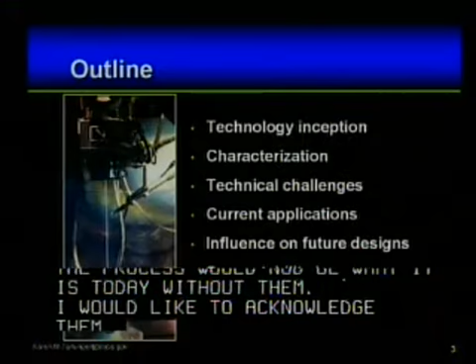Next slide, please. This is an outline for my talk today. I'll start off with the inception of the technology, and then talk a bit about characterization of the materials that are produced using the EBF3 process. I'll then proceed on to some of the technical challenges that we've come across with the process.

Specifically looking at what needs to be solved in order to reach full commercialization. And then I'll switch gears a little bit and talk about applications, both current applications and some potential future applications that we're working on, both for aeronautics and for space vehicles. And then I'll end up with a little bit of the possibilities that this technology may offer for in-space support.

Next slide, please. So starting off with the motivation, a little bit of the process description of the EBF3 process, and then the benefits to talk about the technology inception.

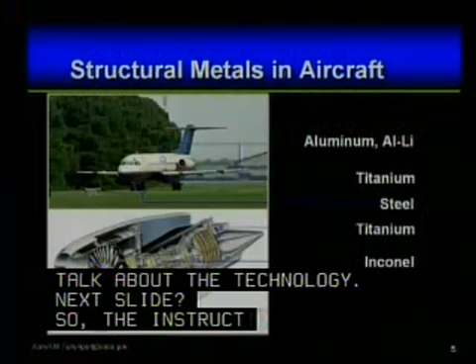Okay, so in structural metals used in aircraft today, typically you see aluminum or aluminum lithium used in fuselage and in wing panels. The highly loaded areas of the aircraft, like wing tips or wing roots, and some of the hot structures in the engine use titanium alloys. High-strength steels are used for landing gear, and Inconel can be used in the hottest sections of the engine. So there's a large amount of metals that go into today's aircraft.

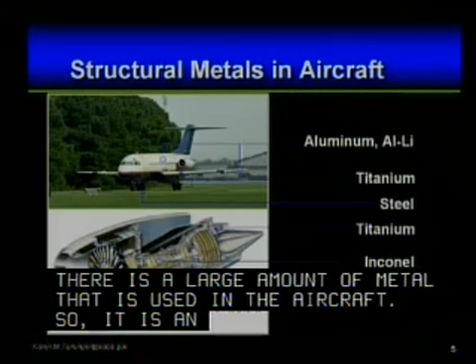And even with future aircraft moving towards composite structures, there's still a significant metallic component in aircraft structures. And so it's an area that we wanted to look very closely at to see what is new on the horizon. We've been building airplanes out of metals for a long time. What's new on the horizon?

Next slide, please. So our motivation, we were challenged back around 2001 to come up with what is new in metals. And specifically looking at efficient lightweight structures, it has to be a cost-effective process, and potential for enabling new alloys that are beyond the current conventional suite of materials that we use were three of the areas that we wanted to look at.

And what we ended up with, we didn't set out to develop a disruptive technology, but we ended up with a disruptive technology. And by disruptive, I mean that this is a technology that has the possibility of replacing a segment of the manufacturing market as it currently exists today.

Next slide. So back in 2001, when we first started looking at what's new in metals processing, layer-additive or deposition processes had been around for several years, but they were primarily using lasers, either a CO2 or a neodymium YAG laser. And the problem with lasers trying to do metals fabrication is that lasers are reflected off of shiny surfaces, and metals are inherently shiny.

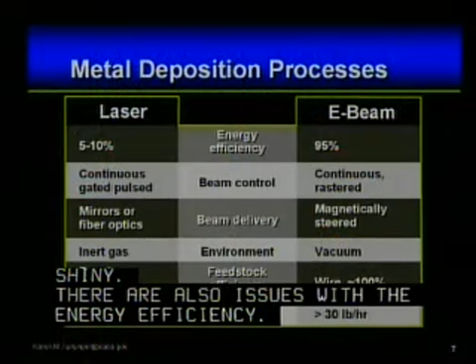In addition to the coupling efficiency between the laser and the metal to be able to melt, there are also issues with the energy efficiency. Only 5 to 10% of the energy, and this has improved over time, but in 2001, only 5 to 10% of the energy that was actually pulled from the wall ended up being used to create the beam. The rest was all waste heat.

So looking at the energy efficiency, the other issue was the feedstock efficiency. A lot of the laser technologies use powder feedstock, and depending on the size of the molten pool they were working with, you could either get 5 to 85% of the powder captured in the molten pool. The rest ended up just being waste powder.

And what really prevented laser deposition technologies from taking off in the commercialized world is the fact that they were limited in the deposition rates. They could only get up to, at the most, 9 pounds per hour, but most of them were down in the half a pound per hour. It's just not an economically feasible or viable technology.

So when we were looking at metal deposition, we said, deposition, to be able to put the metal where you need it and only where you need it, is a good concept. Let's look at what other things could we use. And so we chose to work with the electron beam.

Electron beams have very, very good coupling efficiency with all electrically conductive materials, such as metals. They've got very high energy efficiency. Working in a vacuum gives you a nice clean process environment. And we work with a wire feed because of the vacuum. We're working with a solid feedstock in the form of wire, but 100% of that wire is captured into the part that you're building. And we've demonstrated deposition rates on the order of 30 pounds per hour.

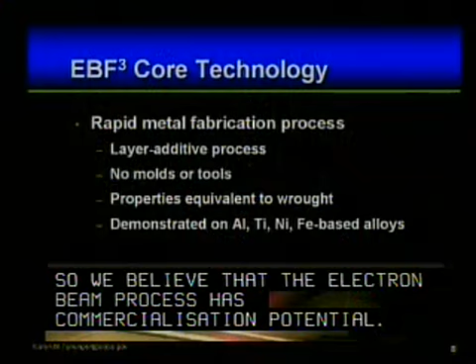Next slide, please. So the core technology for EBF3 is that it's a rapid metal fabrication process. It's layer additive. It does not require molds or tooling, and so a large expense that's used for building tooling for forgings does not have to be absorbed when you're using an EBF3 process.

The properties that we've observed are equivalent to wrought properties, and I've got some charts later on to show you about that. And we've so far demonstrated this on aluminum, titanium, nickel, and iron-based alloys, which are all of the alloys of interest that I showed on the earlier slide for aircraft structures.

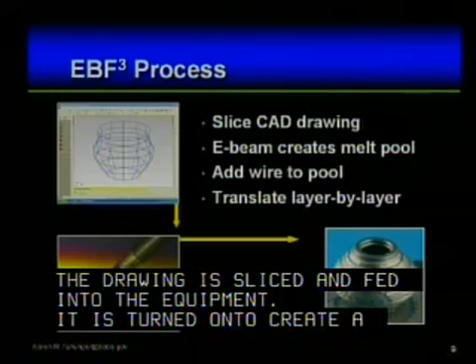Next slide, please. So the EBF3 process, we start with a CAD drawing for the part that you want to build. That part is sliced, the CAD drawing is sliced and fed into the EBF3 equipment. The E-beam is then turned on to create a molten pool, and wire is fed into the molten pool, and then the part is translated in a layer-by-layer basis to build the parts up. We've been teased about building a replicator in the vernacular of Star Trek. Next slide, please.

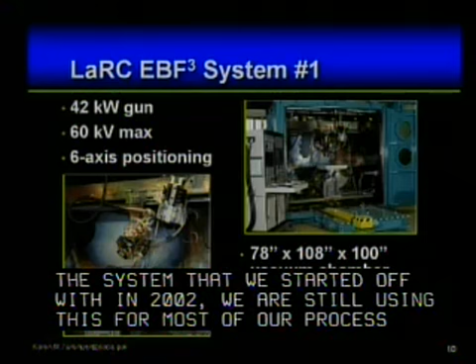The system that we started off with in 2002, we're still using this for most of our process development for our large fabrication experiments. This system is an electron beam welder that we purchased, and we had it modified, adding a double wire feed so that we could build the layers up. It's got a high power electron beam gun. We're only using about a third of the power that is available to us, but because it was a commercial off-the-shelf system, we bought something that could suit what we needed. The vacuum chamber is a 7 by 9 by 9 foot steel chamber, and the build envelope is on the order of 2 by 4 by 5 feet inside of that vacuum chamber.

Next slide, please. Several years after that, we started looking at trying to build a smaller system. The process is exactly the same, so the physics of the process is still using the electron beam to build up a part.

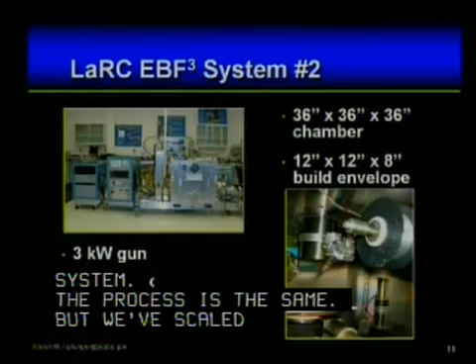But we've scaled everything back so that we could do some demonstrations for 0G. So we built a 3-foot cube chamber with a build envelope about the size of a shoebox. And we've got a 3 kilowatt gun for safety on the aircraft and just to scale everything back. It's enough power for what we need to do.

Next slide, please. So let me set this up for you, next I'm going to have a video. This is a picture looking in the chamber of our large electron beam freeform fabrication system back at Langley.

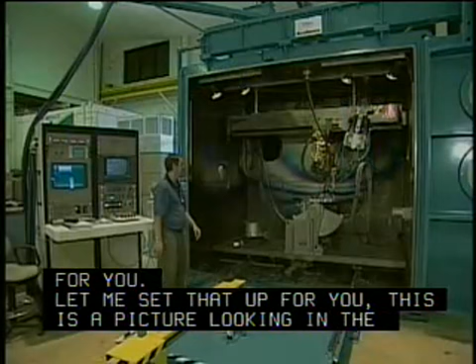If you roll the video, please. This is looking through the door, just showing some of the motions capable in the system itself. Here we're closing the door, and then we would evacuate the chamber down to about 10 to the minus 5 torr. Now our first layer is beam only, so the beam is coming down from the top center of the screen. And the first layer is just to clean off the oxides on the surface and to give us a nice warm surface to be able to adhere the deposit to.

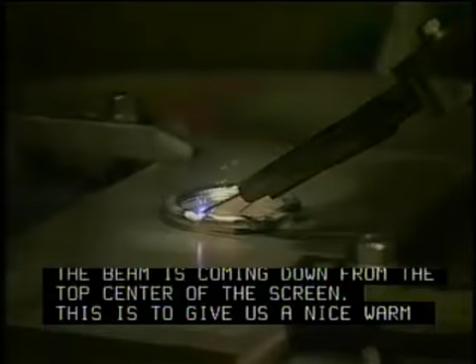Now we're showing the subsequent layers being added on. This is all 2219 aluminum, and this is real time. We can build faster than this, but we're using 0.063-inch diameter wire, and the only part of this that is molten is the shiny part of the molten pool in the image there. So the process solidifies rapidly.

So some of the reasons, I've already talked a little bit about the EBF³ process, but the main idea is that we can build near-net shaped parts, so you can minimize scrap, reduce the part count. It also offers efficiency in design, lighter weight designs, and enhanced performance. The unitized components, unitized meaning being able to build things in a single piece. So instead of building an assembly that needs to be riveted or bolted together, you can build components of some complexity into a single part.

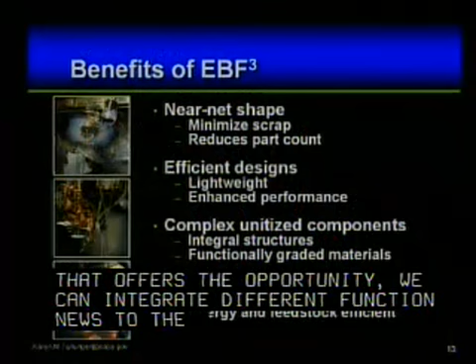And that offers the opportunity, because this is a layer-additive process, to integrate different functions into that structure, or we can change the material on the fly so that you've got different alloys at different points. If you have reason to need different alloys with different properties, we can tailor the properties locally. And finally, it's got some green manufacturing ramifications. This was something that we hadn't set out to do, but it ends up being a nice benefit in that we're minimizing the waste products, and it's energy and feedstock efficient. Next slide, please.

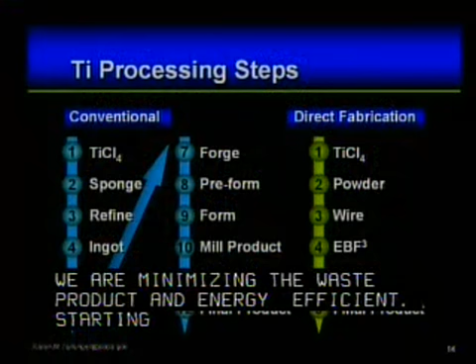To give you an idea as to what I mean by energy efficiency: starting from titanium ore, these are all of the process steps that would be required to go from titanium ore to a final product. On the left, in blue, is the conventional processing that we would use today. So you start with the titanium ore and go through about 12 different steps before you get to the final part. There are losses in energy and in titanium itself along each one of these steps in the process, because you have to forge a billet and then skim cut it, press it down, skim cut it, roll it, skim cut it again. So you've got a lot of losses in the process of just going from titanium ore to a billet and then machining it out to a final product.

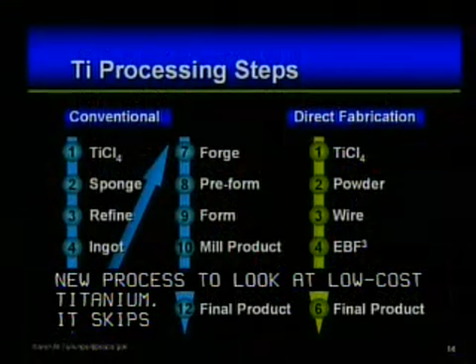DARPA has been working on a new process and has funded several organizations to look at low-cost titanium. The low-cost titanium process basically skips steps 1 through 9 to go directly to a powder form. So you've dropped out a lot of the work that goes into building the preform. And then what we're doing is, we can take that powder, go directly into a wire form, and then that wire becomes the feedstock for E-beam freeform fabrication. So in using this future set of processing steps, you can eliminate about half of the steps and a lot of the losses in both energy and in titanium.

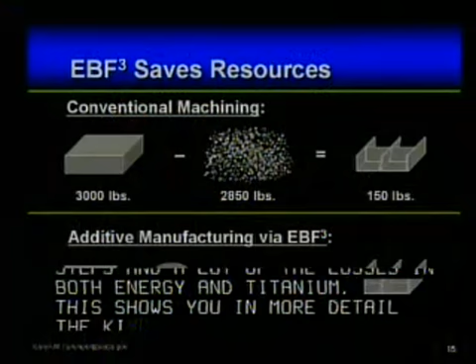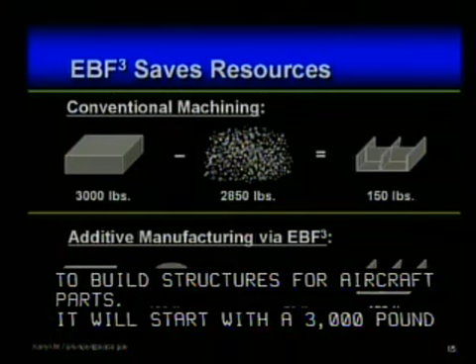Next slide, please. This shows you in a little bit more detail the kinds of savings that we're talking about, and this is the reason that industry is so excited and is really investing heavily now in trying to get this technology commercialized. Along the top line is the conventional machining, and these are real numbers. This is really the way it is done today to build structures for aircraft parts. It'll start with a 3,000-pound billet of material, machine it down to a 150-pound part. There's a lot of obviously, you're losing a lot of the titanium, and a lot of energy that goes into making all of the chips.

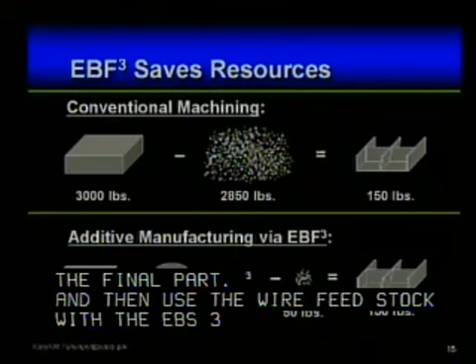And furthermore, there's all the cutting fluids that are required to keep the part cool during the machining operation, and those cutting fluids have to be handled as hazardous waste at the conclusion of the process. So instead, what we're proposing is you would start with a rolled sheet or plate that would become part of your final part, and then use the wire feedstock with the EBF³ process to put the material where you need it. There's a little bit of final machining, but it's just taking it to your final tolerances. And you end up with the exact same part at the end of the day with a lot less titanium lost and less cutting fluid to have to try to dispose of afterwards.

Next slide, please. Now I'm going to change gears and talk a little bit about the characterization of some of the materials we have produced using the EBF³ process, specifically looking at the microstructures, mechanical properties, and some of the structural integrity. I'll try to go easy on those of you that don't have a materials science background.

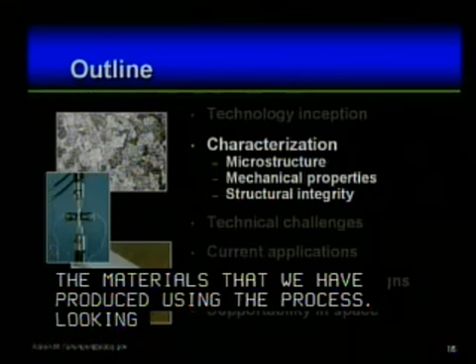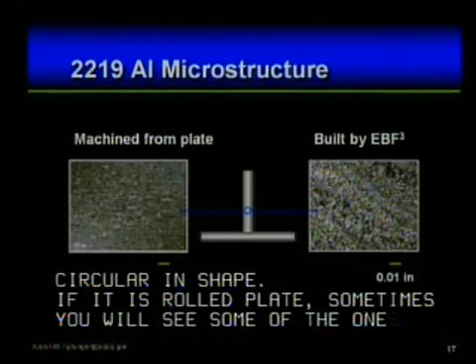Next slide, please. On the left, the picture you see is what a typical plate microstructure would look like. Today's aircraft would have this kind of microstructure, which is kind of an equiaxed grain structure, so everything is kind of circular in shape. If it's rolled plate, sometimes you'll see grains that really stretch out. In comparison, on the right is the type of microstructure we're seeing with the EBF³ process. This is more what you might see in a casting. You see the fine grains and the large. There's a variation in grain size, but it's still a relatively small grain structure.

Next slide, please. Now, taking the picture from the previous chart on the right and looking at it at higher magnification, that's now shown on the left. What you see are things that look kind of like a fern structure, little fingers. Those we would call dendrites, and that naturally occurs in castings on cooling. When you take a molten metal and cool it down, that naturally occurs. But we have relatively small grains in the as-fabricated microstructure.

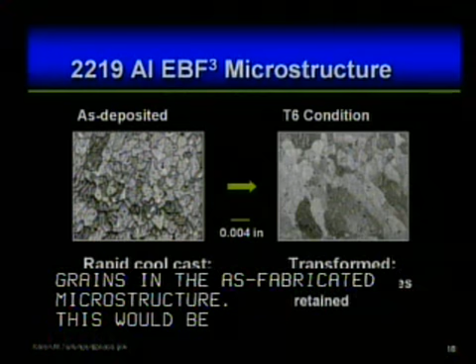Now, if we go through a T6 heat treatment, this would be a standard heat treatment used for increasing the strength of rolled plate in conventional materials. We end up transforming the grain structure, so the grain boundaries are retained, but we've erased, if you will, that finger microstructure. So our microstructure doesn't end up looking too much differently from a forged type microstructure. It's a little bit different, but not too much different.

Next slide, please. What does that mean for the mechanical properties of this material? 2219 - part of the reason we've chosen this alloy is it's an aluminum 6% copper alloy. It's very easily weldable, and it's readily available. It's used in the space station. It's not used as much in aircraft structures today - there are higher strength alloys used today. But we have also done deposition with other conventional aircraft alloys.

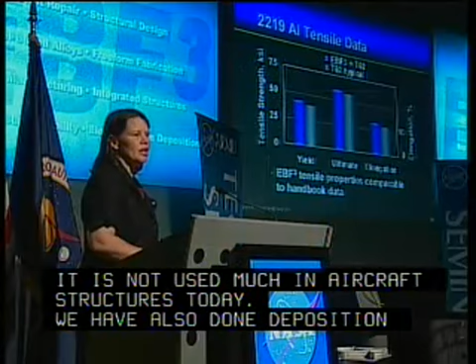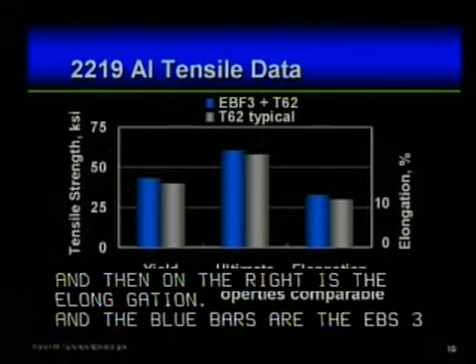So 2219 is the alloy I'm showing you, but we've done extensive testing on a variety of other alloys as well. This chart shows, on the vertical axis on the left, the tensile strength - the first two sets of bars are the yield strength and ultimate strength mapped to the left, and on the right is the elongation, that third set of bars. The blue bars are the EBF³ plus T6 heat treatment, as shown in the microstructure on the previous chart, and the gray bars are handbook typical values for the same heat treatment. What you see is that the properties are really quite comparable. I don't have error bars shown on the chart, but they're within 1 or 2 KSI, so it's a fairly tight data range in the EBF³ parts that have been fabricated. This gives us some confidence that although the microstructure may look a little different, mechanical properties are still performing as you'd expect in a conventional material. We're still doing a little bit of work to understand what that microstructural difference may mean in other mechanical properties like fatigue and fracture toughness, but we've got some confidence that this will work.

Next slide, please. One of the other things we have looked at is functionally graded aluminum. Here the base plate is 2219, again that aluminum 6% copper, and we've graded it up to 100% pure aluminum at the top.

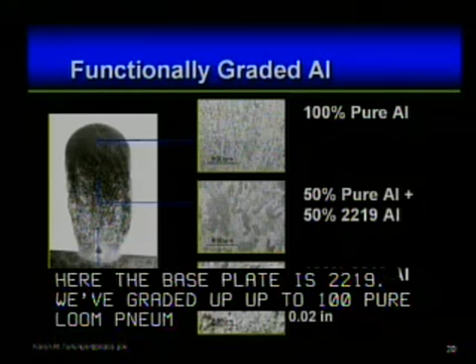So this is what you're looking at - the picture on the left is a cross-section of a 10-layer build. The first layer was 100% 2219, and each subsequent layer was a 10% change in chemistry, building it up to 100% pure aluminum.

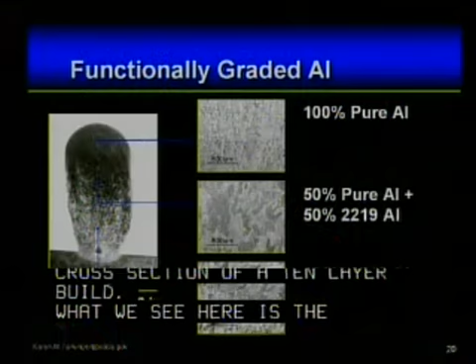What we see here is the microstructure on the bottom is 100% 2219, about what we've seen in other EBF³ deposited 2219. 100% pure aluminum doesn't have alloying additions, so it doesn't have a lot of features. Again, that's what you would expect.

And grading up through the middle, what you do see is that we have a continuous gradation, even though this was deposited in a stepwise fashion.

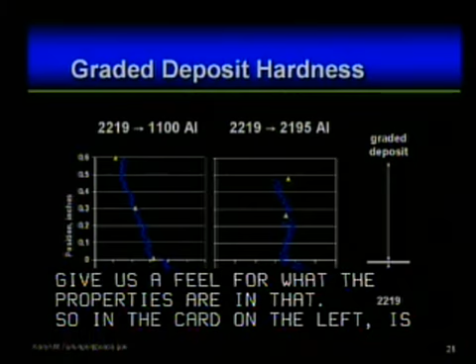Next slide, please. Looking now at the hardness - it's hard to do a tensile property test when your material is changing continuously, but looking at the hardness gives us a feel for what the properties are. On the chart on the left is the hardness data, a hardness trace going up the center of the microstructure shown previously.

The zero axis is the plane of the base plate. Everything below the axis is in the base plate itself, the forged material. Everything above that line is in the deposit.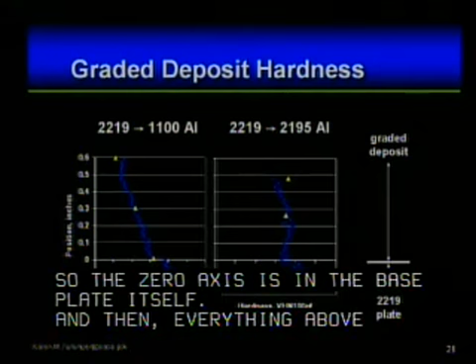I've got two graphs here. The one on the left is 2219 to pure aluminum, or 1100 aluminum. The one on the right is 2219 to 2195, an aluminum lithium alloy. This just shows that we've done gradation with both, going from 0 to 100%.

What you see in the data is a nice gradual shift - the pure aluminum is softer by nature, and you see a gradual transition from the hardness in the 2219 to the hardness in the pure aluminum.

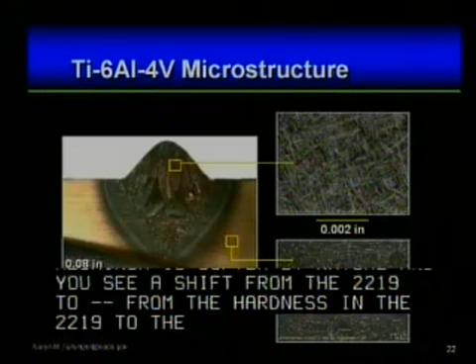Next slide, please. Shifting gears a little bit, looking at the Ti-6-4. Again, this is one of the alloys very heavily used in both commercial and military aircraft. This picture shows on the left a cross-section of a single bead deposit. The picture on the right on the bottom shows what your typical plate microstructure would look like. You see a similar microstructure to what we saw in the aluminum.

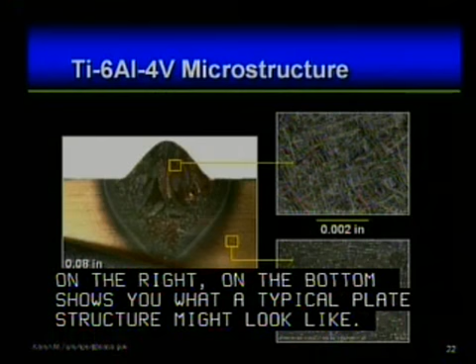The white dots are an alpha phase, and the center parts are the beta phase in the lower microstructure.

The top microstructure shows how different the solidified microstructure is in the Ti-6-4 deposit area - you see what we would call a Widmanstätten alpha-beta lath structure. But heat treatment will bring that structure down to something similar to what we have below.

Next slide, please. Looking at the Ti-6-4 tensile data, again, just like we saw with the 2219, the properties are quite comparable between the as-deposited and the annealed wrought product.

Next slide, please. So the next thing we wanted to do is understand the structural performance if we're going to incorporate this into structures. We built three sets of machined panels, all with the same final geometry, about 24 inches long and 8 inches wide, with a single blade stiffener down the middle about 3/4 of an inch high.

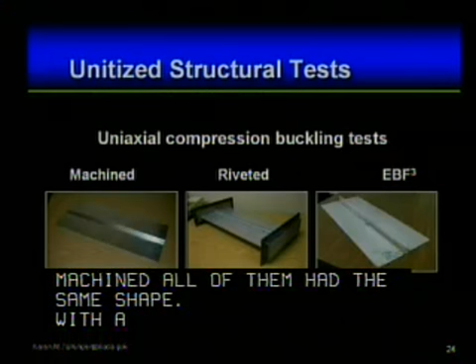For the machined panel, we started with 1 inch thick plate and machined it down, leaving the blade stiffener integral to the base plate. For the riveted one, we started with 1/4 inch thick base plate and used an L bracket riveted on to give us the blade stiffener. Then we E-beam freeform fabrication deposited a stiffener on the third one and machined it so all three had similar widths or thicknesses of the stiffener.

Next slide, please. This is the compression buckling test, tested in uniaxial compression. What we noticed is that the machined panels performed the best. On the chart, you see load on the vertical axis versus displacement. The machined panels performed about 5% better than the EBF³ panels.

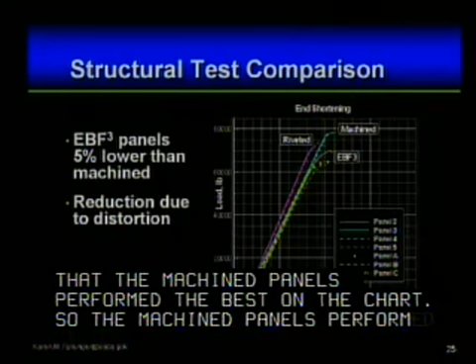The riveted panels are a little bit stiffer because of that extra material, but the riveted and EBF³ panels gave us comparable max load capacity. One thing we've noticed in the EBF³, which I'll talk about later, is that we do have some distortion that occurs because of the focused heat source.

And the distortion, in going back and doing finite element analysis to compare to the mechanical, the physical compression data, we were able to explain that the reduction from the machined to the EBF³ is because of the shape change in the panel that occurred due to the distortion during the EBF³ process. So if we can get a handle on the distortion, we believe that we can increase the structural capacity of that EBF³ panel.

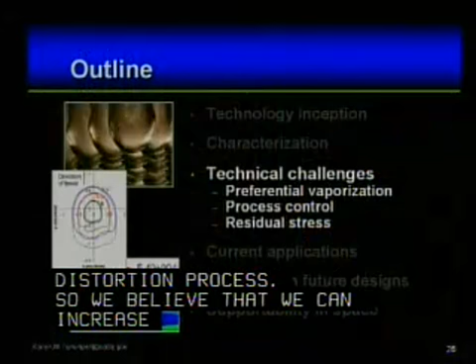Now to talk a little bit about technical challenges, specifically looking at what else needs to be figured out before we can take this to commercialization. I'll talk briefly about preferential vaporization, process control, and residual stress.

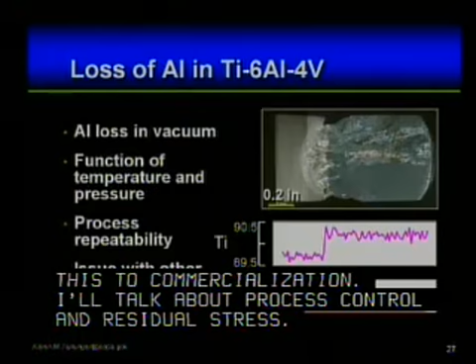So the first one, preferential vaporization - what I mean is, we've got a molten pool in a vacuum. If you've got Ti-6-4, you've got titanium, aluminum, and vanadium sitting in that melt pool. Because you don't have an atmosphere to suppress vaporization, we tend to get a little bit of metal vapor that comes out of the molten pool. The aluminum, we lose at a faster rate than the vanadium or titanium because aluminum has a lower melting temperature than the titanium or the vanadium.

So the picture on the right shows the same types of microstructures I've been showing in the past, only it's now laying on its side. The base plate is on the far left of that microstructure, and then you see the deposit off to the right. The two lines below it show a titanium trace and an aluminum trace. This is just looking at the chemistry along the center line of that deposit.

The vanadium didn't change, but the aluminum shows about a 1% drop. So we start with 6.5% aluminum in the wire and the base plate. As soon as you've melted anything, whether it's in the wire or the base plate, you see that step function drop in the aluminum content because we've melted in a vacuum.

It's a function of temperature and pressure, but it's an issue for process repeatability. So this is one area we're looking closely at - how do you mitigate this, or at least understand it and make sure it's repeatable, so that when we're trying to use this technology in a production environment, we're able to get the same part every single time you build it.

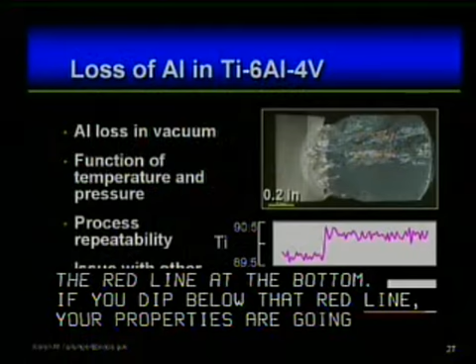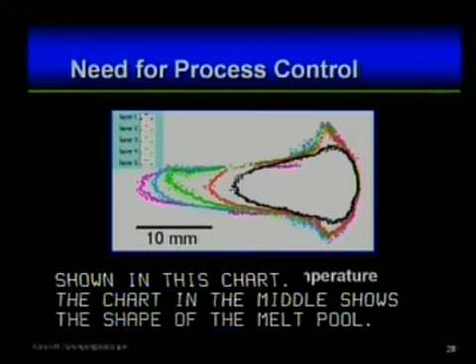The need for process control is shown in this chart. One of the things - the chart in the middle shows the shape of the melt pool. The black line, the smallest melt pool, is the shape of the melt pool on the first layer of the deposit, and then each line out represents layers 2, 3, 4, and 5.

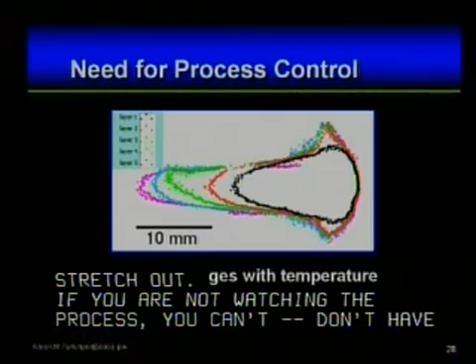So what we see is the melt pool changes with temperature. Your first layer is going down onto a cold plate, and it freezes out fairly quickly - it's got a nice tight melt pool. The next time we put a layer down, everything's a little bit warmer, and so the melt pool starts to stretch out. If you don't make any changes to your process, or if you're not watching the process, you don't have the same size, shape, or temperature in the melt pool, and that's going to have ramifications for the chemistry and the distortion, residual stress, and everything else that we see.

So we've put cameras, thermal imaging cameras, into our system. The picture on the left is the top view looking straight down, so you can see the white line is the trace of our beam itself. The orange is where the metal is molten, and the blue is where it's solid. You see the funny little step out on the far left of that image - that's where the wire is entering the melt pool. The picture on the side gives us a side view. Again, the wire is on the left, and you can see where that wire is being melted in the beam, and then the melt pool traces out from there.

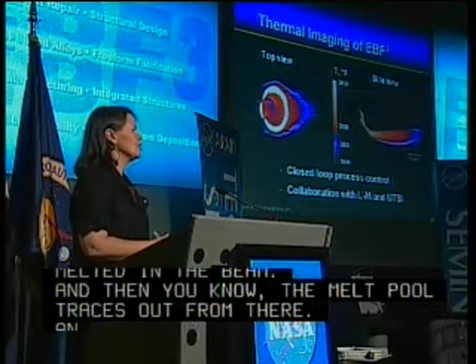And we understand that we need to look at both the height, so that we build the part that we have programmed to build, and the top view, so that we can control the temperature.

Localized heat, we understand, and this is nothing new. This has been very commonly known for decades in the welding industry. But localized heat induces distortion and residual stress. You tend to get very high tensile residual stresses right at the root of the deposit, where you're trying to weld it on, and it just is trying to pull that deposit off of the base plate.

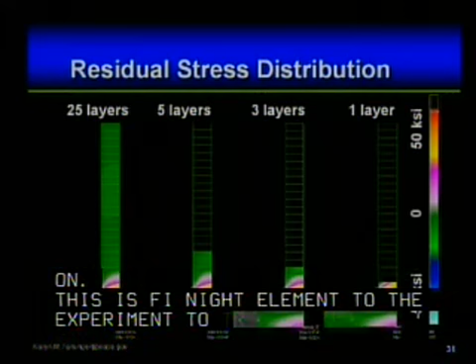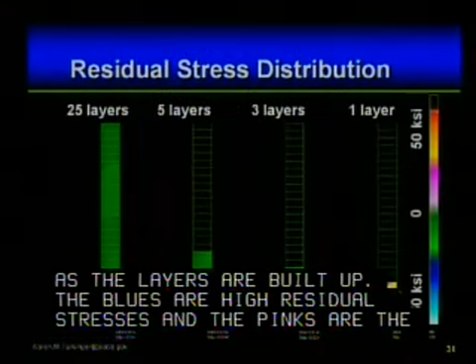This is a series of finite element modeling experiments that we've run, comparing finite element to the experiment to help guide how we mitigate the residual stresses and distortion developing in the material. Across the bottom you see the base plate, and on the far right is the stress state with one bead. The next one over shows 3-layer height and its stress state, so we're looking at how the stress state changes as the layers are built up. The blues are high compressive residual stresses, and the pinks are the tensile residual stresses counterbalancing that. But what we see is that after about 3 to 5 layers, the stress state really doesn't change.

So we know that if we're going to build an integrated structure where the deposit is part of the base plate and it's going to stay that way, if we want to avoid distortion, or minimize the distortion and residual stress, we need to do it in the first couple of layers of build.

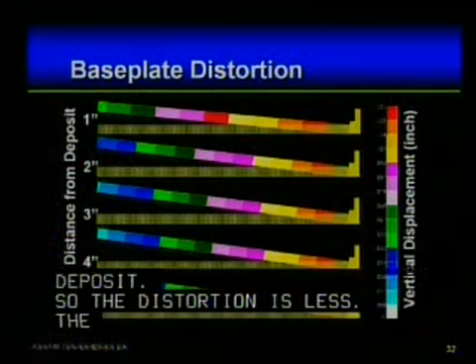The experiment we were running here had a series of different clamping distances away from that deposit. What you see is that the distortion is less when you clamp it and constrain it up closer to the deposit. The further away the clamping gets from the deposit, the more the base plate is allowed to move a little bit while the process is cooling down.

We've been working very closely with Boeing, Lockheed, Spirit Aerosystems, and the Air Force, and we've recently formed an alliance with these companies. It's a joint funded alliance, but what we're trying to do is develop process standards and catalyze growth of a supply web, and address all of the technical challenges I've just described. NASA has been asked to lead this because of our leadership and the fact that we've been at the forefront of this technology development for so long, and also because we offer the potential for providing public benefit without private preference. What I mean is that we'll develop this for the good of the nation, not for the good of one single company.

This group has just started working together, and we've been exchanging ideas. The real idea is we want to try to pull together the buying power. Boeing, Lockheed, and Spirit each had activities on their own, and so now by working together we can get a much richer database in a faster time frame with all of us working together.

The other thing this allows us to do is catalyze growth of a supply web. Right now there are no companies out there that use the EBF³ process for profit. So if Lockheed or somebody decided they wanted to buy a part built with EBF³, there aren't places they could currently go to buy parts in the marketplace. There's growth that needs to happen, and by all of us working together, we can show there's a much larger volume of need compared to any one of us trying to convince a company that this is a good technology to invest in.

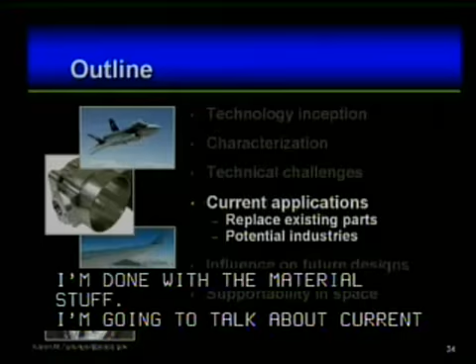All right, I'm going to talk now about some applications—I'm done with all the materials stuff, big sigh. I'll talk first about current applications, and the first place this is going to really see use is replacing existing parts. So I'll talk a little bit about how we may be replacing existing parts, and then some industries outside of the aerospace industry that we've talked to that have interest.

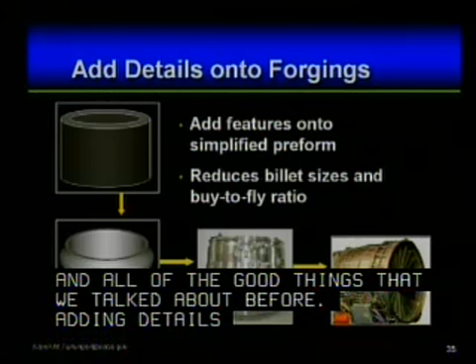The way engine casings are built, they start with a 3-inch thick forging. They machine down to a 1/2-inch wall thickness, but they have to have a 3-inch flange at the top, which dictates the size of the forging. So what they would like to do is start instead with a 1/2-inch thick forging, and then add bits of material on to build up the bosses and flanges that they need for the final part. It reduces the buy-to-fly ratio and the billet sizes and all the good things we talked about earlier. But adding details onto forgings is really the first place this is going to see real commercial benefit because of the cost and the reduction in the amount of material you need.

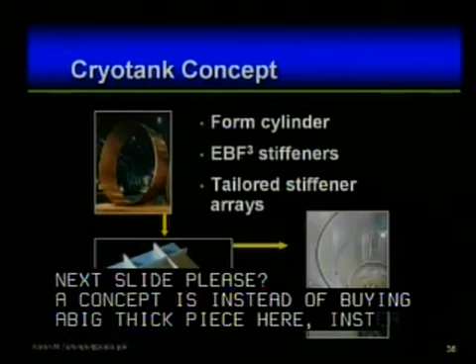A concept for cryotanks that we've been working on: instead of buying a big thick piece of aluminum and machining it down to leave an orthogrid stiffened structure inside, we've been working with companies that can build a very large single piece cylinder, 14 feet in diameter. But they can't put stiffeners on the inside because of the shear forming process used to build it. So what we're proposing is, is there a way we could get inside after it's been shear formed and build those stiffeners in place?

This is where some of our crossover into our portable system starts coming in, because you've got to be able to get onto the inside of this cylinder. Our portable system could be put onto a robotic arm and moved around on the inside of that cylinder to build the stiffeners that you need.

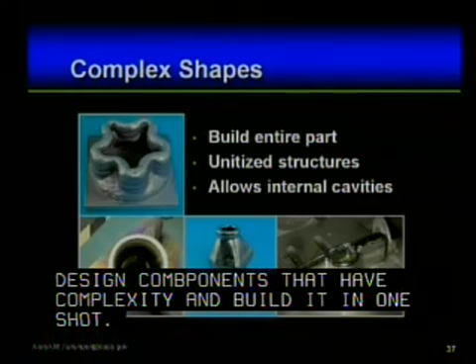The other idea is to be able to build more complex shapes. So instead of designing something as an assembly, we design components that have some complexity and build it in one shot. This shows a couple of different parts we've built to date out of aluminum and titanium, ranging in size from 4 inches high to about 22 inches in height. This allows you to get some complexity, like internal hollow cavities, that can't be machined unless you build it in multiple parts and assemble it or weld it together.

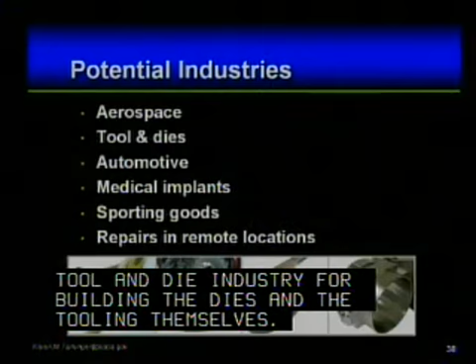Some of the industries that have expressed interest: aerospace industry, obviously. The tool and die industry, for building the dies and tooling themselves, because of the functional gradient you can hard face a tool, a casting tool, and get longer life out of it. The automotive industry, not for full production automobiles, but for aftermarket parts, or perhaps the racing circuit, where there's high demand for customized parts.

Medical implants, so a hip joint can be designed directly for the patient instead of saying you look like a medium or a small, being able to build a hip joint that fits the socket it's going into. Sporting goods, and I think that's the first place we'll probably see Tiger Woods out there with the EBF3 golf club. And finally, repairs in remote locations. If we can build a small system—this harkens back to the interest in space—it's the ability to give the autonomy of being able to build whatever you need when you need it, on demand. There are some locations on Earth that may have that requirement as well.

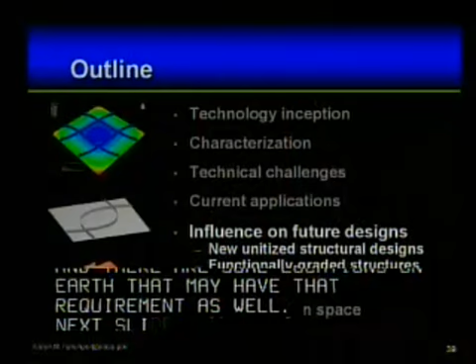So looking now into the future, everything I've talked about so far is just replacing the way we build things today. If we can get into the designer's heads, how would things look in the future? So looking at some new unitized structure designs, functionally graded structures, and some integrated systems.

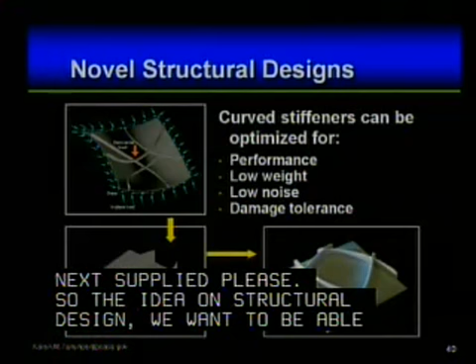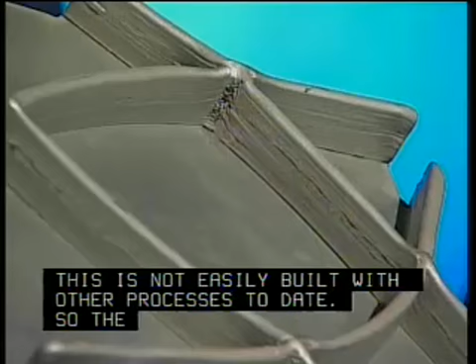The idea on novel structural design: we want to go from a straight stiffened design. Right now an orthogrid panel would have straight stiffeners in an orthogonal array, partially built that way because it's been designed to be assembled. Instead of designing something with a straight grid structure, we think you can optimize that structure to not only carry loads but also perform other duties, allowing the stiffeners to curve. Because we're putting metal only where you need it, you can build something like this with the EBF3 process—not easily built with other processes to date. Curvilinear stiffeners have potential benefits in damage tolerance, acoustics, reducing weight further, and enhancing other performance metrics. This is what we want aircraft structures to go to today, or in the future.

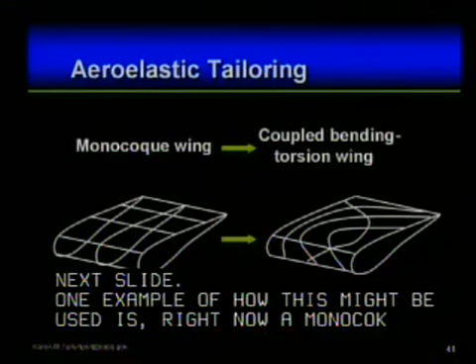One example of how this might be used is aeroelastic tailoring. Right now, a monocoque wing is built with ribs, stiffeners, and spars all on an orthogonal array, riveted together. The new airplanes coming out have structures that look the same, just glued together with composite. The challenge is that this design carries aerodynamic loads, but the bending and torsion that occurs in an aeroelastic event, like wing flutter, aren't taken into account. So the thought is: can you build something that couples the bending and torsion so the wing naturally deflects when hit with a loading? By using curvilinear stiffeners, we believe we can change the structural design to naturally get that kind of motion into a wing as a completely passive structure.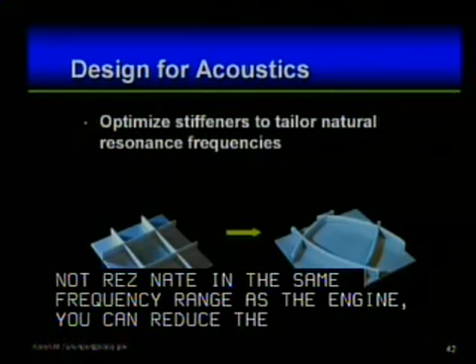Designing for acoustics. Right now, with a straight stiffener, you get what you get acoustically, and they add acoustic liners and dampening material to shield passengers from engine drone. If instead you could curve the stiffeners and tune the frequency of that panel so it won't resonate in the same range as the engine's acoustic noise, you can reduce not only the acoustics going into the cabin but also the fatigue loading caused by built-in vibrations. So these are some possibilities, things we're trying to work towards, that we think this technology may be able to apply to.

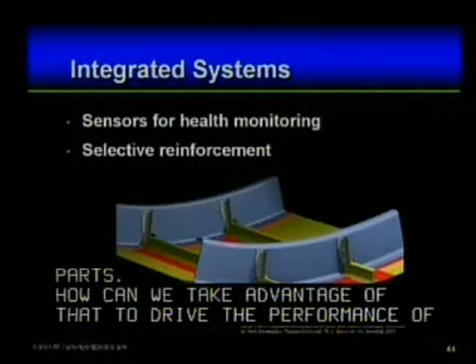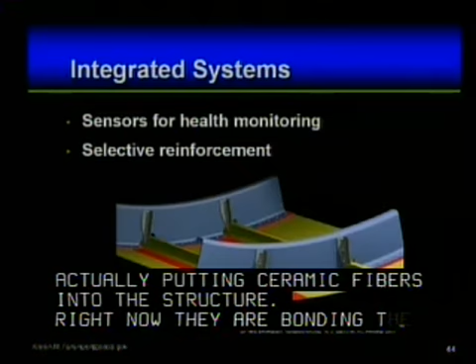Integrated systems. This is a riveted structure shown, and the red lines are areas identified for selective reinforcement — putting ceramic fibers into the structure. Right now they're doing it by adhesively bonding ceramic fibers onto the metal surface, which serves as a crack stopper for longer panel life and locally stiffens the panels. Instead of an adhesively bonded stiffener, can we find a way to selectively reinforce by incorporating those ceramic fibers into the part as we're depositing it? Another potential is vehicle health monitoring, where we want to monitor temperature, strains, stresses, cracks, and everything else. The ability to embed sensors into the body of a single-piece metal structure may open new design space using this technology.

Okay, last section of the talk. Instead of the aeronautics world, now looking at space — supportability in space. I'll talk about why we might want to do something like this in space, then show results of some zero-G flight testing we've done. I've got some fun video to show you, and I'll talk briefly about possible applications where the technology may offer benefits.

The need for supportability. For long-duration missions, they've run a series of Monte Carlo simulations at NASA JSC to predict what parts will fail, so they know what to throw in the toolbox for a mission to Mars. What they found is that each time they ran the simulation, different parts broke.

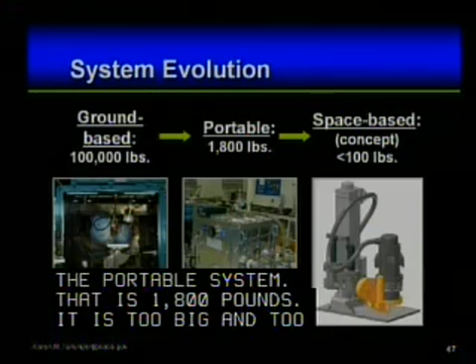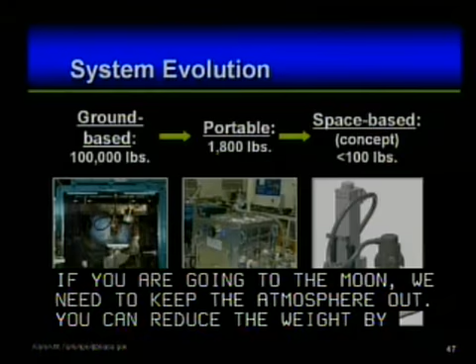Next slide, please. Now, one of the things we had to understand - we were told, well, if you take this in 0G, you're just going to build ball bearings. So we wanted to look closely at how the process is going to change as we reduce gravity.

First thing we wanted to look at is the cooling path, because we know the cooling path influences temperature. The first layer goes onto a cold substrate, so there's plenty of thermal mass to cool that bead down. As you build up in layers, not only do you have a lot of retained heat because you're building onto something hot, but you've also reduced the cooling path down through the part you've built.

And the reason this is an issue - next slide please - is because surface tension is a function of temperature. Our question was: the two droplets here, before we did our 0G flight test - this is a bit exaggerated, but those two droplets have equivalent droplet volume. So the question was, is gravity working with the wetting forces to spread out that molten pool, or is surface tension really driving the process, pulling that bead up into a tight bead?

Next slide, please. So we've done a series of five weeks of flight testing down at NASA JSC on their C9 reduced gravity flight. For those not familiar with that aircraft, they get on the order of 15 to 20 seconds of 0G. You can get a little bit longer if they're flying a lunar or Martian parabola, followed by a 1.8G pullout, and they do about 40 cycles per flight.

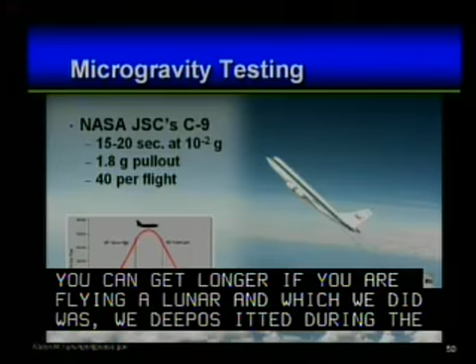So what we did was we only deposited during the reduced gravity portions of the flight. Since everything solidifies as soon as we turn off the beam, we were fairly certain we weren't changing anything during the pullouts.

Next slide, please. Okay, so next I've got a series of videos that shows you some of our results. Before we run those videos, I want to set up what you're going to be seeing. The beam is coming down, as in the previous set of charts, from the top. What you see there is the wire feed nozzle - right now it's got a little ball of aluminum from a previous deposit sitting on the end of it. In this case, we're just moving the base plate, and we're looking through a little camera through the port. So, run video please.

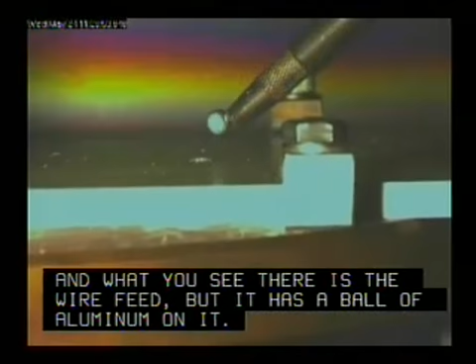The first pass is just that preheating pass. When the wire starts coming out, it shoots that bead off, and you see the wire go down, the wetting forces overcome the surface tension, and we are able to deposit quite well. We started a little higher than we should have, which caused that bead to form at the beginning. This is that same circle now about 8 layers up, and you can see that it looks just like on Earth.

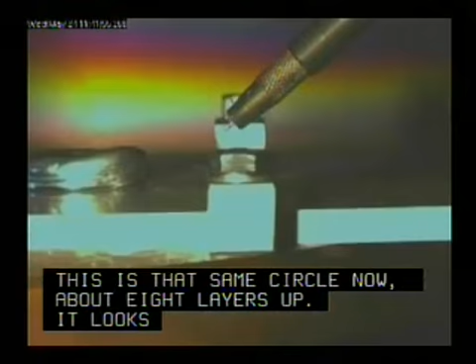We did have the opportunity to learn from the 0G flights. We had a couple of situations, shown in these next two video clips, where we had the height off. As long as you're feeding the wire and it's melting close enough to the molten pool, close to the surface, everything adheres. But if you get your height off, things go bad in a hurry. When we start separating from the molten pool, it just builds a bigger and bigger blob until we get close enough. What's encouraging is that the wetting forces do overcome the surface tension, so the process does work.

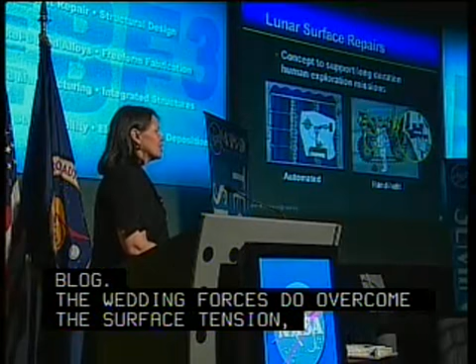The other thing we've learned is that height is absolutely critical, especially in a reduced gravity environment. I have here the part we were building in that video, to show it in more detail so you can get a feel for the size of those features. In 0G, those blobs continue to build up on the end of the nozzle, so they're much bigger than you'd get in a 1G drip.

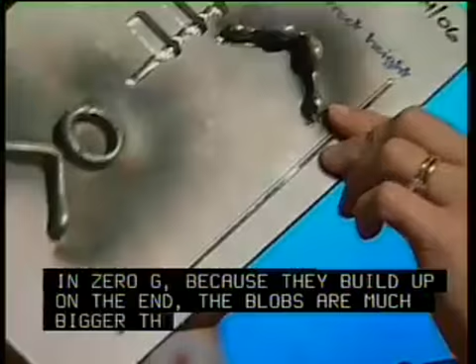So this is the part that went down, and it looks pretty good, but you can see how much of a surface change we had there when the drips started getting away from us.

So where could we use this? We think this could be a concept for supporting long-duration human exploration missions, either on the Moon or on Mars.

We've also looked at the possibility of using this for on-orbit assembly or repair, building extremely large structures in space. We worked with DARPA a little bit—DARPA actually funded our very first set of zero-G flights, because they were interested in building a 100-meter space telescope in geosynchronous orbit. One of the things they wanted to demonstrate was that you could manufacture it in orbit, rather than just sending it up and assembling it—there was actually a manufacturing process component to that. So it's possible you could use this in conjunction with pre-manufactured parts for on-orbit assembly or repair.

The other thing is that, just like the need for autonomy on the Moon, there are similar places where self-supportability is required on Earth. Down at the South Pole, they are without resupply for 6 months out of the year because of the ice floes. The Army has interest in reducing their supply chain, and they've actually deployed a machining center, bringing bar stock and machining components in Kuwait and Baghdad to fix Humvees and things like that as they go. Navy ships and submarines also have interest and need for the autonomy and on-demand repair and fabrication that the EBF³ process may offer.